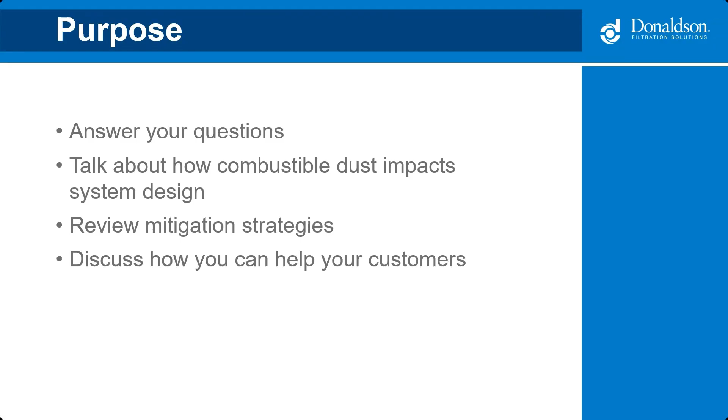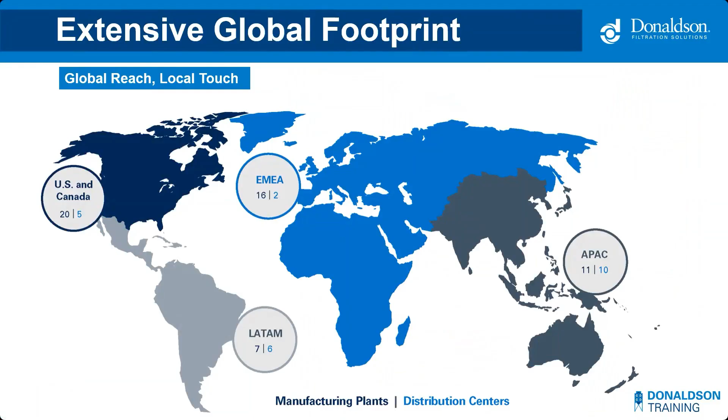In case anyone isn't familiar with Donaldson Company, we've been solving customers' complex filtration challenges for over 100 years. We were founded in 1915 by Frank Donaldson Sr., who invented the world's first filter for a tractor engine. Today, we're one of the largest providers of unique filtration technologies, and we excel at producing high-quality filters and equipment. We pride ourselves on having a global reach with a local touch. Our world headquarters is here in Bloomington, Minnesota, but we have about 54 manufacturing plants around the world and 23 distribution centers.

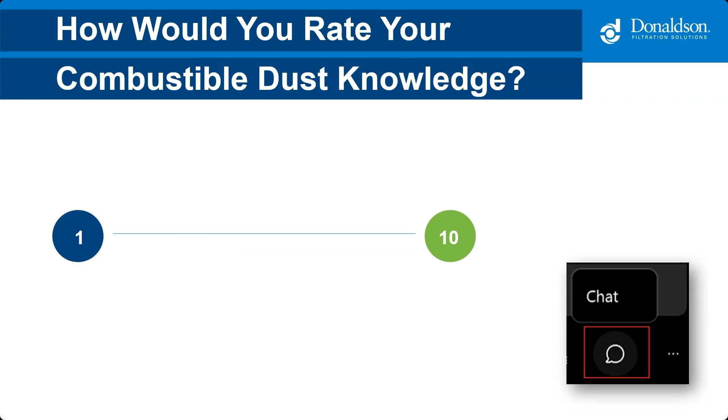It was from those 2 events that OSHA created this national emphasis program, and they started looking at combustible dust in industries that create combustible dust as part of their manufacturing process. In 2007, they released the national emphasis program, and they highlighted some of those industries. Food, ironically, was not one of them. And the following year, there was the Imperial Sugar event.

Imperial Sugar is a well-known catastrophic combustible dust incident. That revised the national emphasis program. They added food and additional industries.

Since 2008, there really wasn't much change to the national emphasis program, besides the creation of the NFPA standards and ongoing updates to those standards. And throughout it all, combustible dust events continue to happen. In 2015, there was a massive flash fire in Taiwan, and events happened both locally in the US and worldwide. Didion Milling was one that was in Wisconsin in 2017.

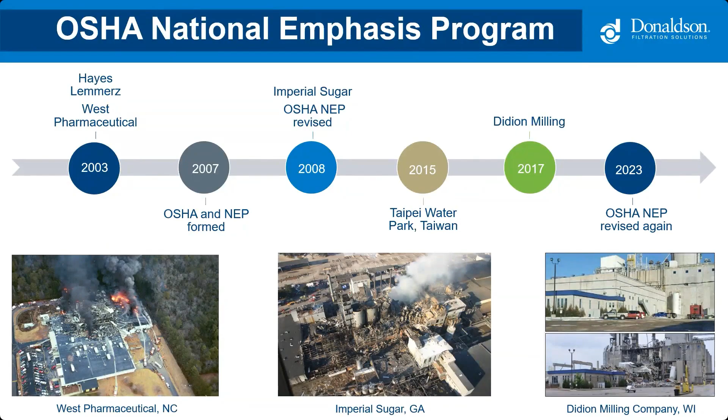One of the great things about all of these events is we can learn from them, and hopefully that's what we're going to do today, talk through them. It is something that happens every day, and continues to happen. So by building awareness, by learning about this topic, hopefully we can help reduce some of those next significant and major fatalities from happening in the future.

So we talk about OSHA. OSHA is in most cases a code that manufacturers will have to follow, but NFPA is what's called a standard. So in the US, we have both codes and standards. Codes are adopted by cities, states, and municipalities. Famous ones would be the International Fire Code or the International Mechanical Code.

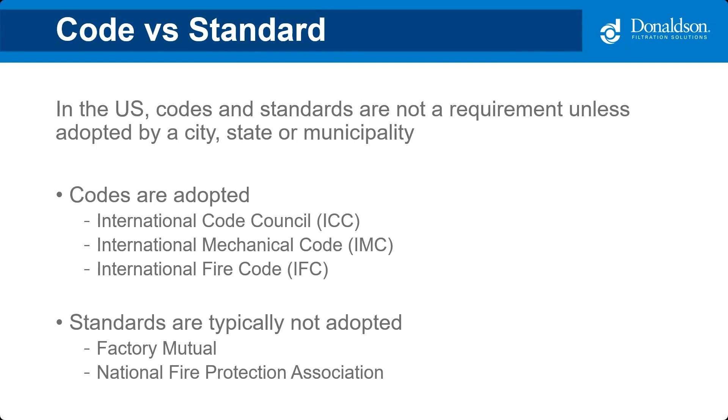Standards, however, are not typically adopted. So NFPA is a standard. It is written like a code so that if it is adopted, the language is right there, but unless it's adopted, it's not actually enforceable. Other standards would be Factory Mutual. They are an insurance provider and they have their own written standards for how they handle and manage combustible dust incidences.

This is what NFPA standards look like. These are most commonly used in the combustible dust realm. NFPA 660 was created last year, end of 2024, and it's a culmination of all of the previous industry-specific standards for combustible dust. You may have heard of 652, the standard on fundamentals of combustible dust, as well as 484 for metals, 61 for grain or agriculture, 664 for wood. Those were all put together into one giant standard, NFPA 660.

It provides guidance quickly for your generic guidance, doing your DHA, management of change efforts, all of that, as well as industry-specific standards. The reason why they did that is because they found that processes and manufacturing facilities around the world didn't actually just use one type of material. They often found themselves using wood and the general standard, or using grain and wood within their facility. So by having everything in one place, it provides easy access to all process owners to see the differences in how the mitigation strategies are approached.

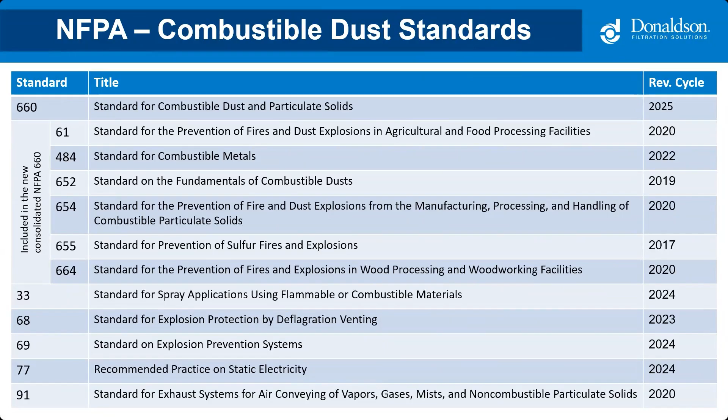In addition to 660, we will often reference 68 and 69 for mitigation strategies such as deflagration venting and explosion prevention systems like isolation, as well as 77, which is bonding and grounding and static electricity procedures, and then 91, which looks more at your industrial ventilation systems.

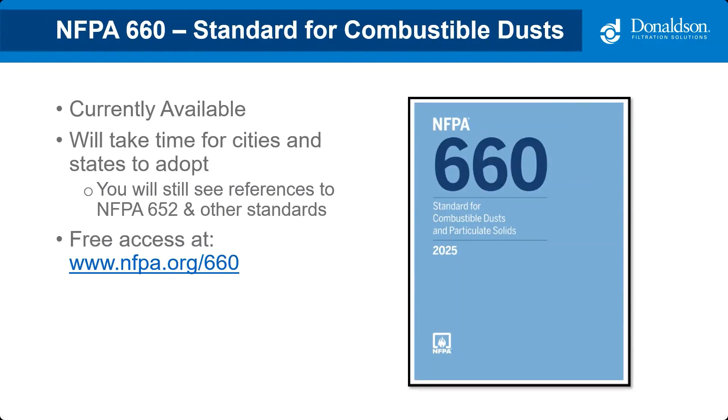660 is going to take some time for people to adopt, so you will still see reference to other standards. I encourage you to go on to nfpa.org if you have any questions. All of the standards can be accessed for free. You can also purchase copies if you want to mark them up and reference them as you'd like.

So besides attending trainings like this, what can you do to help familiarize yourself with combustible dust? The first step is to just get awareness of NFPA. Familiarize yourself with combustible dust hazards, with the type of materials you're looking at, ask about local codes, ask about FM Global if that is appropriate for you. Otherwise, familiarize yourself with the NFPA standards. Awareness is going to help increase our mitigation strategy, which is hopefully going to produce better results going forward as we continue to grow in the manufacturing industry.

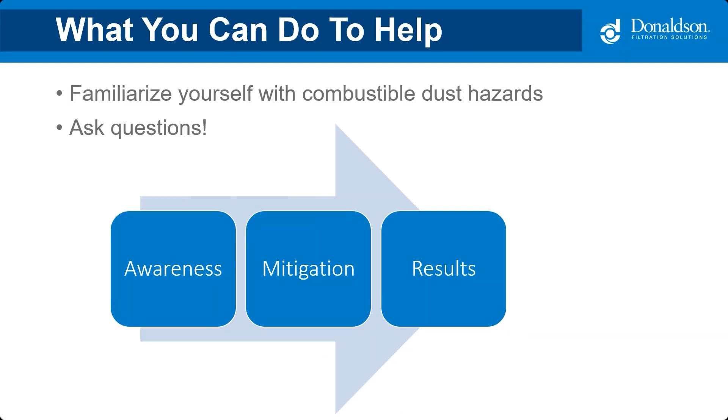So there's three main combustible dust hazards that we deal with. These fine particulates will change based on either the manufacturing process or the type of products that are produced. But in general, the fine particulates do present three types of hazards: a fire, which is a fuel source, that's your combustible dust; oxygen, usually a system will have air pulling it through; and an ignition source.

So it's important to address these risks throughout the whole life of the process. So looking at different scenarios, how does your risk profile change if it's at startup, if it's at normal operation, and if it's at upset conditions, right? Based on when we're using our products, we want to understand what are the potential hazards that we could come across really at any given time.

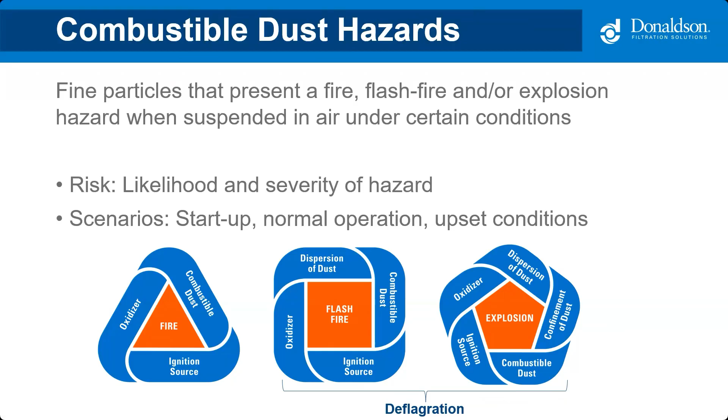So why dust collectors? Well, we collect dust. That's what we do. So if we are managing and collecting a combustible dust, that creates the fuel within our environment. During normal operation, our filters will often pulse clean using compressed air, and that pulse is what disperses that finely divided particulate into the environment.

We, in most cases, will have a fan that's moving air from point A to point B, so that's creating oxygen within the system. The dust collector housing creates a confined space, right? All of this is happening within a dust collector housing.

What we don't provide is an ignition source. Ignition sources will come externally, just like the fuel is brought into the collector. Ignition sources can also be brought into the process. And so because we have potential for all five of these, fuel, dispersion, oxygen, confinement, and ignition sources, to be present, dust collectors are a very critical part of an overall mitigation strategy.

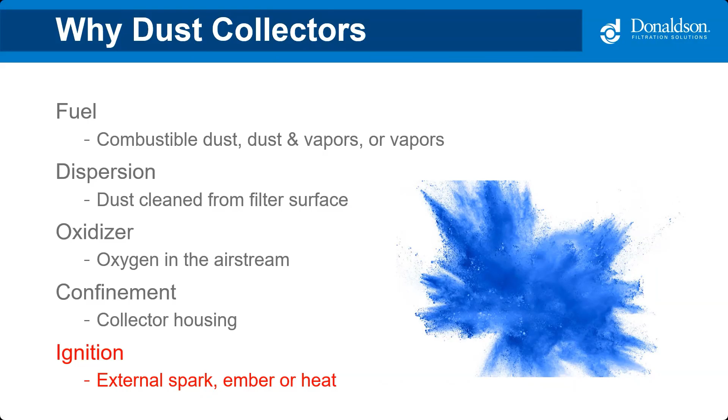So what if you don't know if your dust is combustible? Usually if you're working with an engineering firm or you have a brand new facility that you're building, you don't have dust to get tested, and so you may not know if it's combustible or not. If you do, the quick answer is you should get it tested. If we don't have that dust, we'll talk a little bit about how we can get some insight into the potential if that dust is going to be combustible or not.

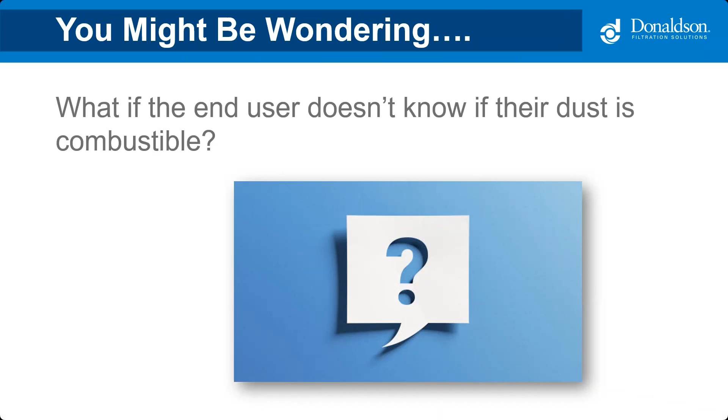So when it comes to combustible dust testing, we want to make sure we understand what's in the airstream. The easy one is if it's a dust, right? We can get dust tested, and there's third-party companies out there that will do combustible dust testing. The two main ones are going to be testing for a KST and a Pmax value. These are going to give you an indication of how explosive these materials are going to be.

Higher explosivity levels will mean you need mitigation strategies that are going to react faster than lower KST or Pmax values. In addition to KST and Pmax, things like minimum ignition energy—how sensitive is that dust to an ignition source—might be important, especially if you have a dust that has a very low sensitivity value.

Things like bonding and grounding or media choices might be really important to that strategy. Minimum explosible concentration looks at whether you have a sufficient quantity of dust to even create the environment for having an explosion. Within the dust collector, usually when you're collecting dust, yes, we do have that. So it's not really a strategy of saying, I'm going to clean my dust collector really well, and therefore I don't have an event. Not really a strategy we recommend.

If you also are dealing with any gases, VOCs, or other contaminants that could come through, there's also testing such as your lower flammable limit. Those are a little bit more challenging, and again, maybe not known at the beginning of a process, but it's important to recognize if you do have them—we have testing methods available to help indicate additional hazards that might be present within the system.

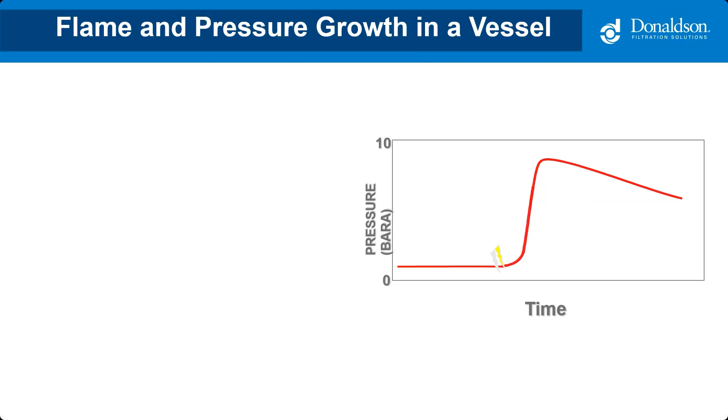So this is one of my favorite charts, and it helps explain all of the different pressure related terms as they relate to combustible dust. So what you're seeing on the screen is a graph of the pressure wave during a deflagration. The little lightning bolt there, that's our ignition source. And what you can see is this red line is going to escalate very quickly. The highest value that that pressure is going to achieve is called your Pmax value.

This is the maximum pressure reached in a contained deflagration. That P max value is usually in the realm of about 8 to 10, maybe up to 12 bar. That's usually what we're seeing. That P max value is not going to be something we want to try and contain.

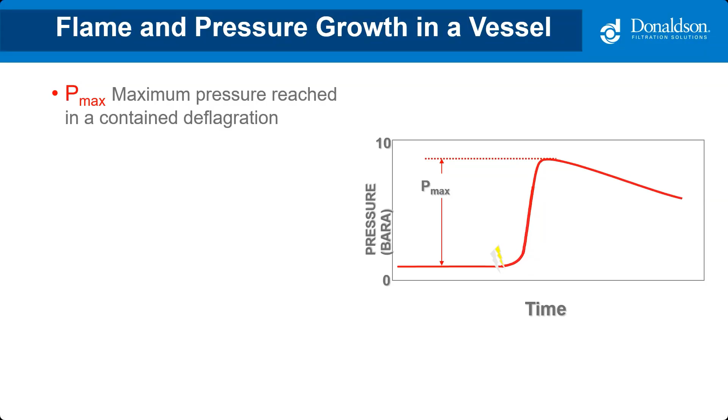It doesn't make sense to build your dust collector so that it withstands the P max value. What we want to do is incorporate a predetermined weak point in the collector to let that pressure out of the vessel. That weak point is going to be an explosion vent. An explosion vent is specifically designed to open at a significantly lower pressure. We're talking 0.1 bar for those of you who like your numbers. That explosion vent is going to open far before we can even reach that P max value.

Now, as that explosion vent opens, that pressure wave is growing so quickly that not all of the pressure can be released at one time. So you still will have this growing pressure rise that's going to be created within the vessel, and then it's all going to exit through that opening of the explosion vent.

That growing pressure, that residual pressure, is called your P red value. This is a calculated value, and it's based on the volume of the vessel, the type of dust that you're collecting, the size and quantity of the explosion vent, and a lot of other factors. What we want to make sure is that the enclosure strength of the collector, the rated P red value of the collector, is above that residual P red value.

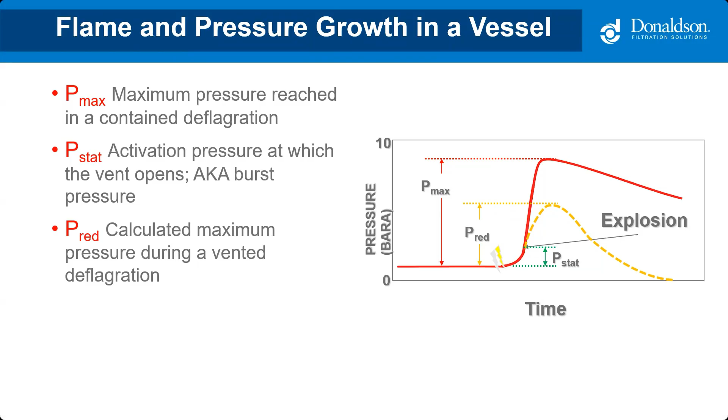We want to make sure that nothing else is going to open or cause issues, that all of that pressure is going to be released through those explosion vent openings at one time.

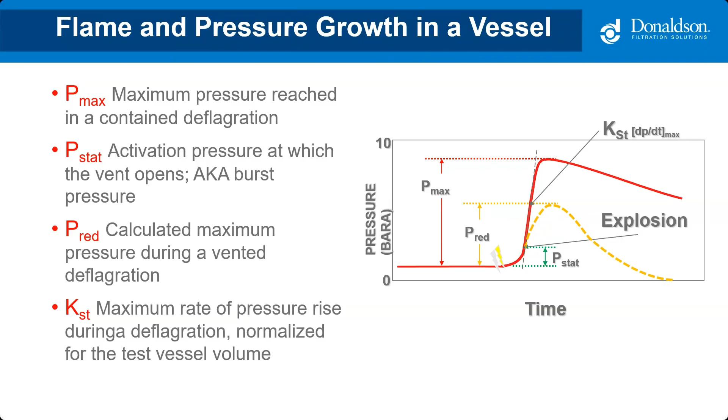The slope of this line is your KST value. It's your rate of pressure rise over time. And this KST value is going to be anywhere from 1 to 300, 400, 500 bar meters per second. So it can really vary based on the type of material that you've got, but it's basically going to indicate how quickly will that dust reach that maximum pressure.

If you don't have dust to test, there are other resources that you can access to get a feel for if this material is going to be combustible or not.

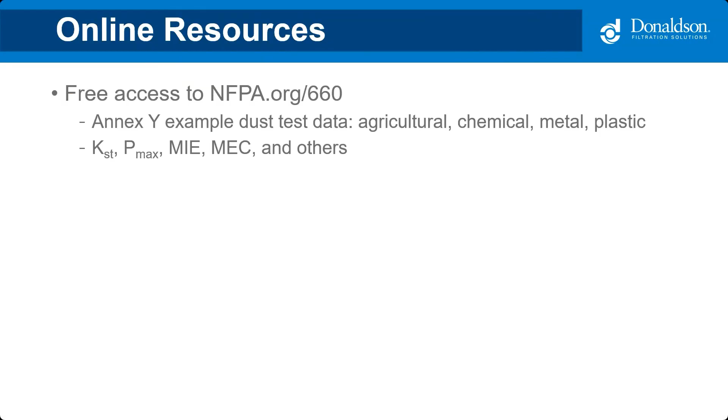NFPA.org slash 660, in the annex, they have information on common dust materials for agriculture, chemical, metal, and plastic industries. They'll list generic KST values, MIE values, and other information.

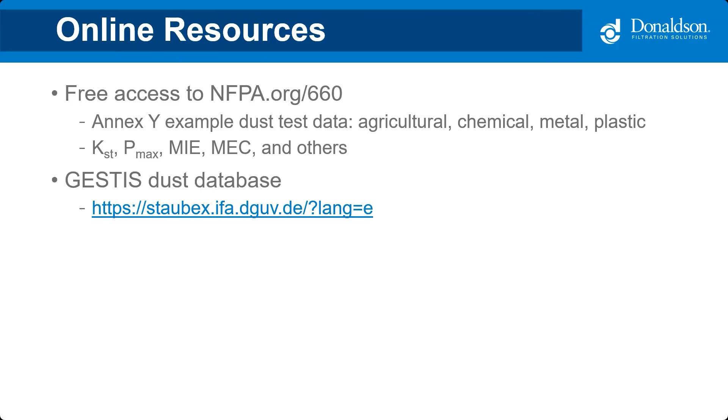So an ST1 dust is something that's less than a KST of 200. An ST2 is between 200 and 300, and an ST3 is anything greater than 300.

Again, even though it says weak explosion or a strong explosion, this doesn't mean that you're not going to have damage. Any type of combustible dust event has the potential to create damage within your facility, so we want to make sure they're mitigated appropriately. The reason why we ask for KST values is because depending on the value, that will change the mitigation strategy that you use to minimize and reduce those risks from happening.

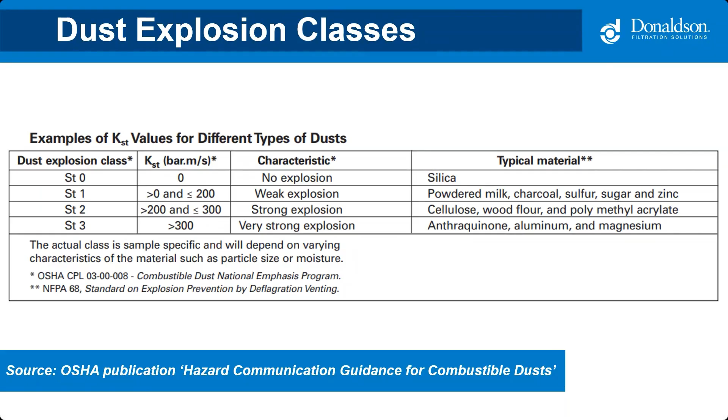So as you go through and look at this, part of the industrial ventilation system and the design of the system is really important. We want to make sure the combustible particulate is captured appropriately and conveyed at an adequate velocity to get from point A to point B.

It's filtered appropriately, right? We have the right media, we know what the contaminant is, and then you've got clean air that is either returned back into the building or exhausted to an outside atmosphere.

Depending on mitigation choices and where the collector is located, there's a lot of design factors that go into the system. You also have the risk of people modifying the system. How would the addition of a new process impact the strategy? Does that throw off airflows in the system? Does it add new contaminants? That's going to be part of a management of change practice that process owners will want to consider.

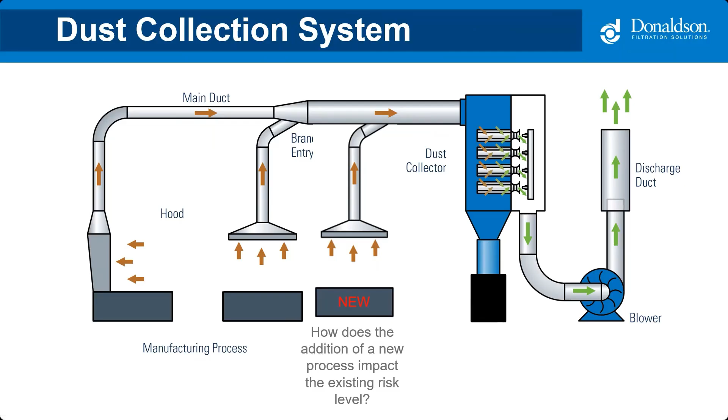We use the Industrial Ventilation Manual for sizing dust collection systems. This year they added a new hazard management section, addressing its role in designing industrial ventilation systems as part of an overall mitigation strategy. NFPA 660 also added information stating we need to design the system so we have adequate velocities to capture, control, and contain the dust. We want to make sure we've got good pickup points and velocities within our duct system, and for that they also reference users to the ACGIH Industrial Ventilation Manual.

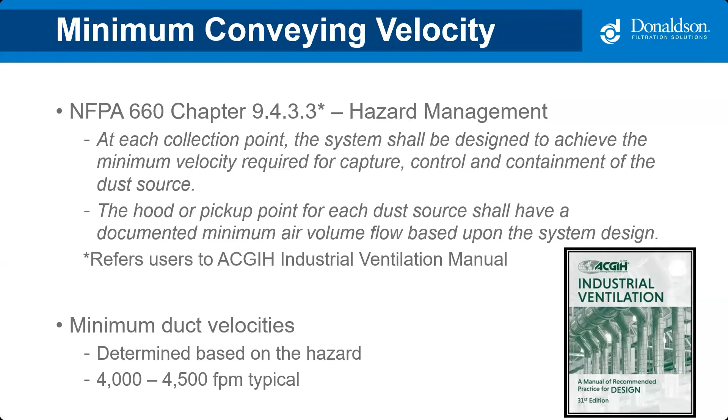Depending on the dust you are collecting, we want to look at different conveying velocities within the system. All of these conveying velocities will impact the static pressure of the system. It might impact changes to duct size, changes to airflow, which then might impact changes to fan horsepower or other things.

If you don't have enough velocity to convey the material, the result would be material settling out in your ductwork. We want to avoid that at all costs. We design systems to maintain the minimum velocity at all times, even if there are challenges or unknown factors once the system is installed.

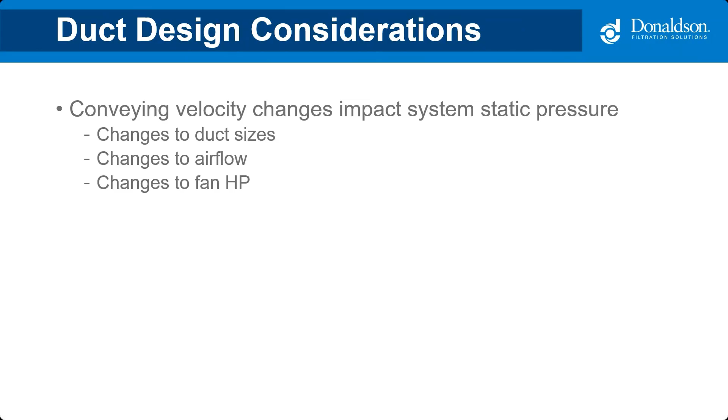We also want to minimize obstructions in the ducting. We recommend using a balance by design approach rather than blast gates, because blast gates can create a potential for material to build up within the ductwork. You also want to have clean out doors appropriately spaced throughout the ductwork so you can do a visual check to make sure nothing is settling out.

If possible, use controls like VFDs and airflow controllers to maintain or at least indicate if you have a reduction in airflow, as that could lead to an increased potential for a hazard such as dust or material settling out in your ductwork.

One of the big questions is returning air to a building or exhausting it outside. This is a great question and I get it all the time. The answer really depends on the type of material you're collecting. We might address this later in the presentation, but if you decide to return air rather than exhaust to the outside environment, just know that NFPA often requires additional mitigation equipment, such as a safety filter or some means of detecting a breach in the primary filters. They also recommend having a way to divert air to the outside atmosphere if there's a fire or something else going on within the system.

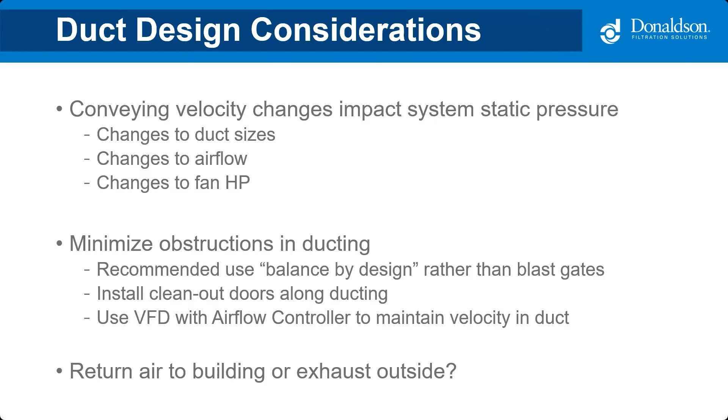So if we know the dust and the airflow, we can start looking at the right technology for what we've got going on. There's a lot of different dust collection technology out there. We've got cartridge style and baghouse style, your more traditional styles. We also have wet collectors and enclosureless collectors, even some intermittent shaker style collectors. A lot of these can handle various mitigation strategies, so explosion vents, chemical suppression, flameless vents, or no mitigation. It really just depends on making sure we've got the right technology to filter the contaminant, and then looking at how we support this with the mitigation strategy.

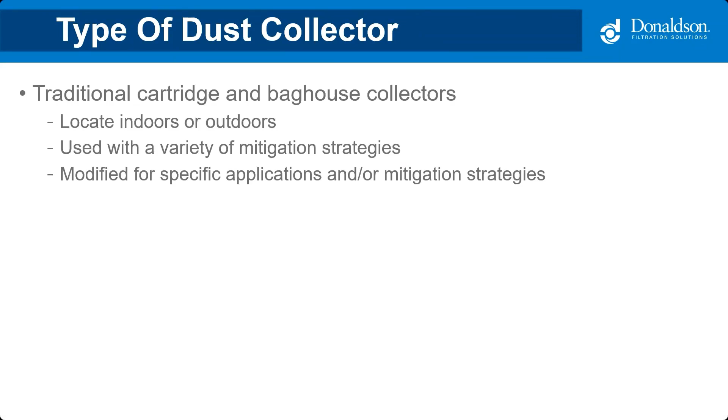Traditional cartridge and baghouse collectors are quite easy actually. They can be used with a variety of mitigation strategies. They can be indoors, they can be outdoors, and they work across various industries and applications.

You've got a fan, and you would have dispersion potentially, depending on how the system works, but you don't have the confinement—that's your enclosureless system. So without that, you don't have the risk of an explosion per se, but you do still have the risk of a fire and a flash fire because you have everything else in your system.

These are sometimes a strategy that intermittent processes will adopt. They are limited by airflow and by application. So if this looks like a potential option for you, I suggest reaching out and getting some more information on how it can potentially be a strategy for you.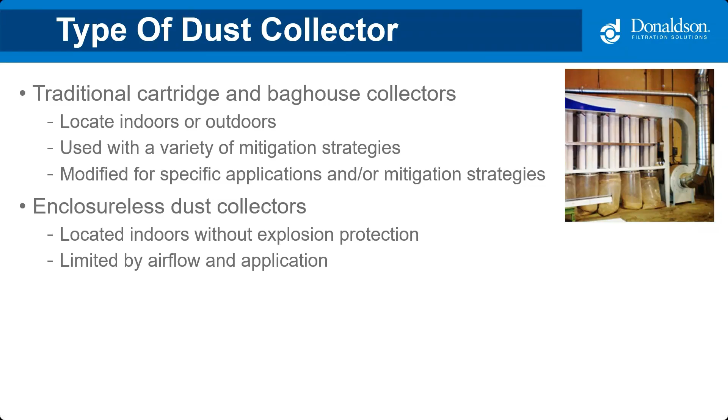The other one is a wet collector. NFPA 660 in the metals section often recommends using one of these to help mitigate the effects of a fire or explosion. It's really important that you pay attention to material compatibility so we don't have any sort of off-gassing or other issues created by this.

Wet collectors are a different technology than your traditional cartridge and bag houses, so it's important that you look at all system requirements—installation and maintenance—compared to other types of technology.

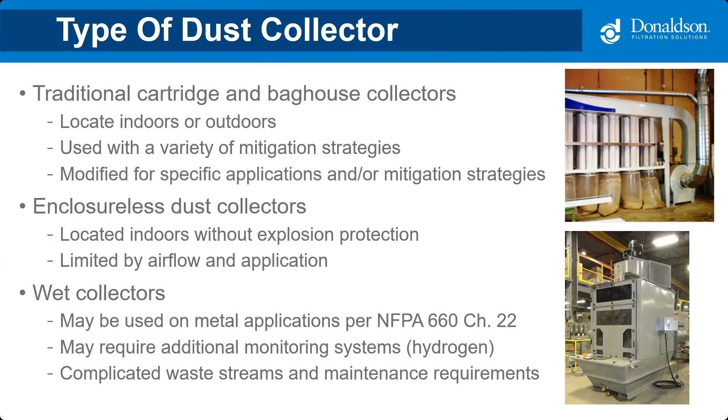NFPA really wants you to have the collector outdoors, as does OSHA. They always recommend that. If you've got a collector volume greater than 8 cubic feet, it shall be located outside of a building. However, if it's properly protected for fire and explosion risks, it could be allowed in.

If it has a dirty air volume less than 8 cubic feet, or if it's a wet collector or an enclosureless collector, those are allowed to be indoors. When in doubt, put the collector outside.

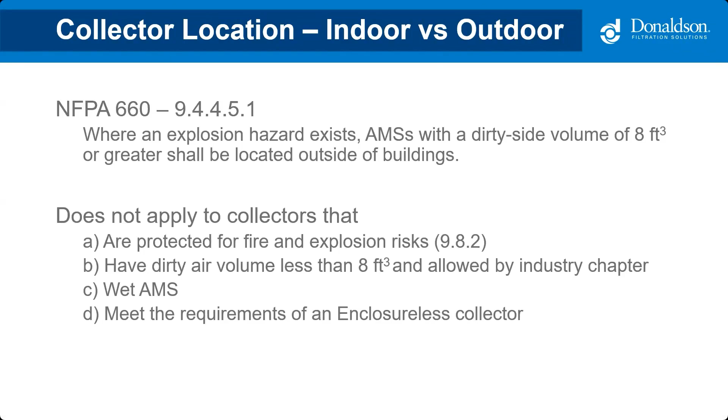The exemption for small collectors less than 8 cubic feet is not because there's no risk. Just because you use a small vessel to collect the material doesn't mean that vessel changes the characteristics of the dust and it's no longer combustible. That's not true—your dust is still combustible, no matter what you collect it in.

The requirement for less than 8 cubic feet comes into play because it's physically hard to mitigate a small vessel. Eight cubic feet is 2 feet by 2 feet by 2 feet, and it's really challenging to put an explosion vent on a small vessel like this. So those strategies become very impractical, and that's why it's in here.

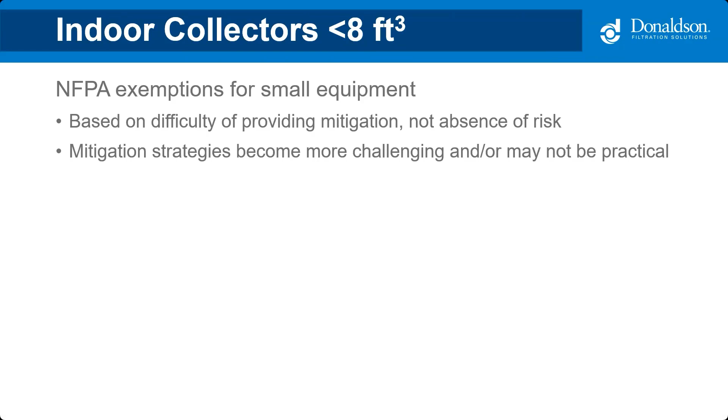The standard is more for little small vacuum systems, and for those you will find specifically designed NFPA compliant vacuum systems. If you choose to go this route, NFPA recommends that during your DHA, your dust hazard analysis, you look at the potential consequences of a fireball.

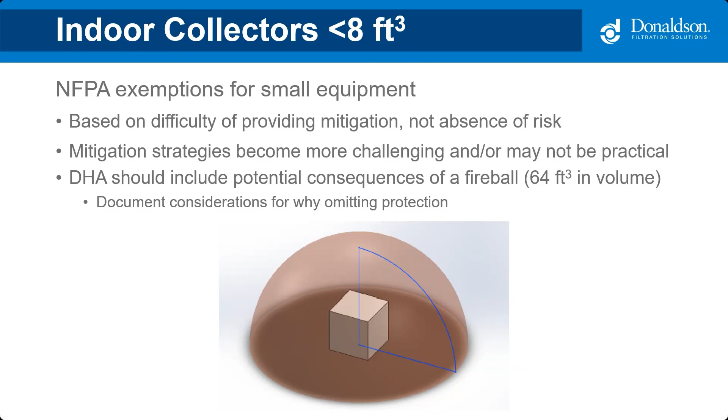So if something happened, they recommend looking at 8 times the volume—8 times 8 is 64 cubic feet in volume. If your device is sitting on the floor, this would be a sphere with a radius of 5 feet in all directions. It's important to look at, based on where this device is located, what is potentially in the area that could get harmed if something were to happen.

NFPA gives guidance on central versus dedicated systems. Their big thing is not mixing contaminants. So if you have a wood shop where you've got saws, lathes, and sanders, it's all wood dust—just in different shapes and forms depending on the process creating it. All of that dust can be brought to one collector to be filtered out. That's called a manifolded system.

If you had a job shop with different lasers cutting aluminum, carbon steel, and stainless steel, you would want dedicated collectors for each specific application. The reason is that if you brought all of those metals to one collector, mixing them could create the risk of a thermite reaction. So looking at the operation and the different contaminants you're generating is really important in figuring out what dust collection strategy you're going to go with.

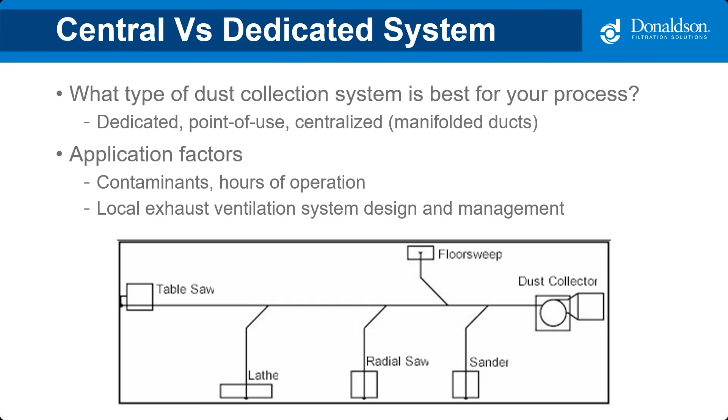For media, NFPA 660 says it can be constructed of combustible material. Most traditional dust collection systems are. Filter medias are cellulose or polyester, and you'll see that across all of the industry.

We want to make sure that all things are conductive, so not using ductwork made out of PVC pipe, but using metal duct that's all bonded and grounded. Anytime we've got a combustible dust, bonding and grounding practices are advised, just to make sure we don't have any isolated components within our systems.

We have epitropic or anti-static media, as well as media that can have a ground wire in it. That ground wire is used to bond together the inner cage with the tube sheet so that we don't have those isolated components.

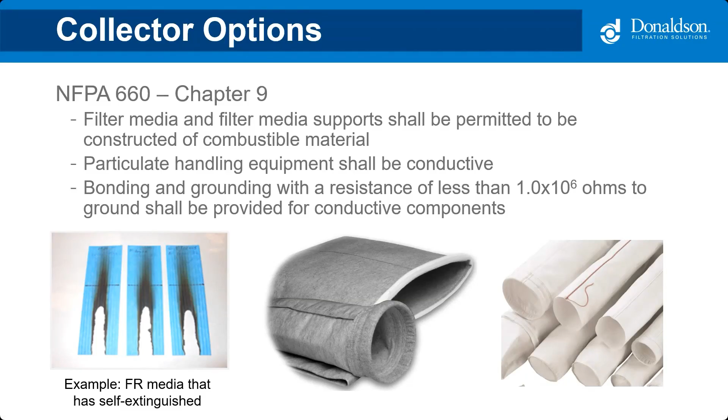In all of this, we also want to pay attention to the configuration of the dust collector. A lot of mitigation strategies are impacted by volume and height, such as explosion vent sizing. They look at those features of the vessel itself. So if you have a tall and skinny vessel, it could be more challenging to mitigate or provide enough vent area compared to a shorter and wider collector. This will also impact discharge devices and other options and features within your collector.

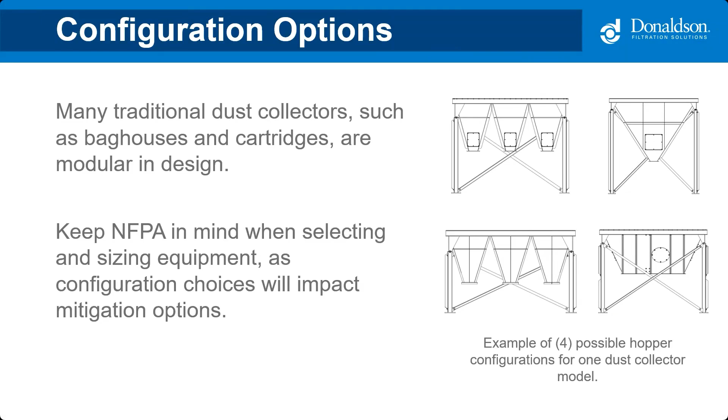So what are some typical mitigation options? Well, there are a lot of manufacturers out there, and they all have very similar versions of the same device. It's really important that we pay attention to the different high-level things, but always ask questions to those suppliers to make sure that you're choosing the right device. But we'll go through a couple of them.

So NFPA 660 has a new method for complying with the NFPA standards. This section is new, it was rewritten when they created NFPA 660. For those of you who have attended these webinars before, you might have seen a simplified version of this page where it was either a prescriptive requirement or a performance-based requirement. Simple. Now what NFPA is saying is you actually have to do two things.

In addition to either using mitigation strategies that are followed by a prescriptive requirement or a performance-based requirement, you have to follow the prescriptive methods outlined in chapters 5, 7, and 8 of NFPA 660.

These chapters cover your dust hazard analysis and your management systems. So things like doing your DHA, and then once you've done your DHA, identifying hot work practices, training for your employees, training for contractors, preventative maintenance schedules, identifying near misses, and all of these other things that most facilities are already tracking.

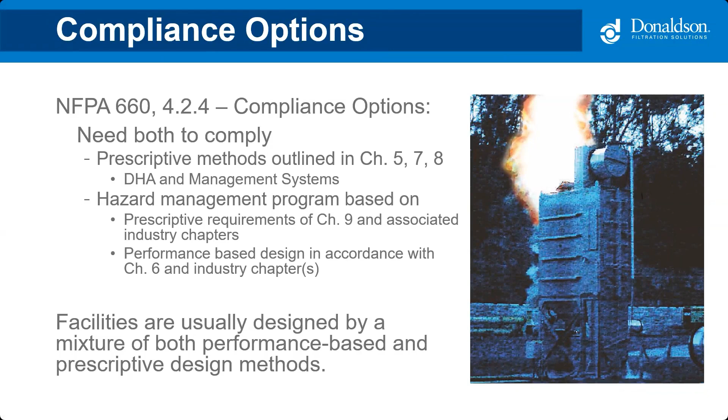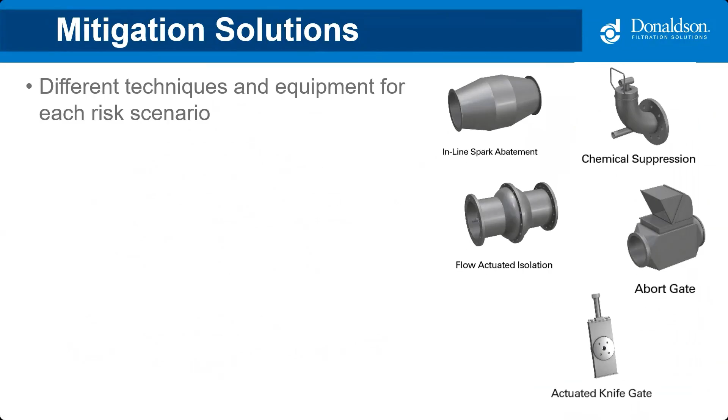So when it comes to mitigation solutions, there are different techniques and equipment for each scenario. Even if you have a sister facility in one state and you're in another, you're going to potentially have a different risk scenario. We want to make sure you choose strategies that meet the needs of your process and your dust hazards. And then you also look at different or associated system components.

Some of these systems, such as a flow actuated isolation valve, a flameless vent, knife gates, chemical suppression systems, they all have to be tied to a device that can shut down the fan. So if you don't have that integration with the control panel, the product might work, but the next steps of what happens in that sequence of events may not follow through.

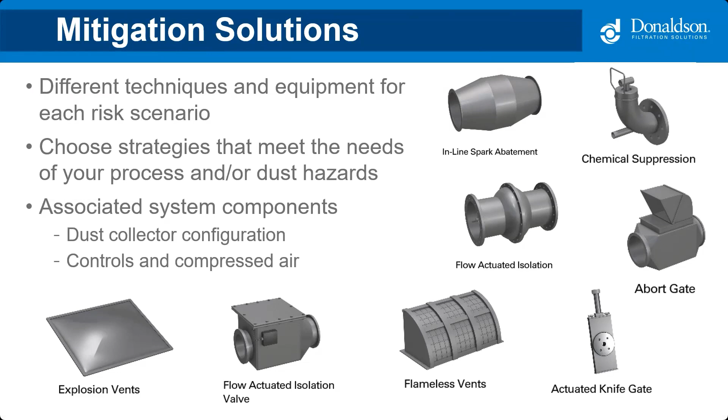When it comes to fire prevention, there are different strategies. We've got active spark abatement. That is looking at a spark detection and extinguishing system or a detection and abort system. There's passive devices that will go in line in the ductwork. And then you can also choose to have an inerting agent, such as adding lime or something to render the material non-combustible or non-flammable.

For secondary events, we have abort gates. That's going to stop smoke from getting back into your facility if you choose to return the air.

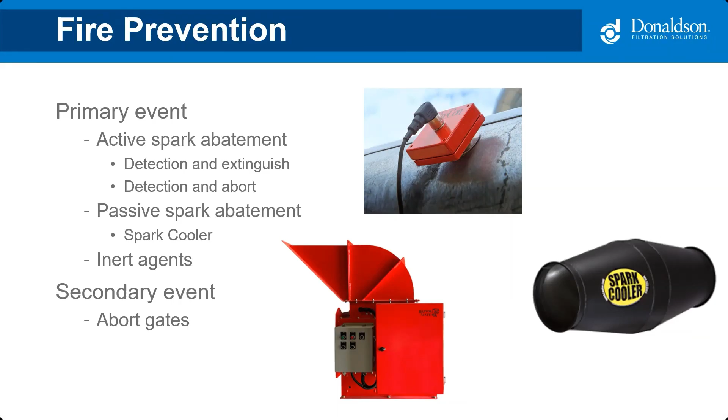When it comes to fire protection, we have wet and dry sprinkler systems, CO2 and argon. The biggest thing on this page is making sure you're using a material that's compatible with what you're collecting. If you're collecting aluminum, using water or a sprinkler system to suppress a fire is not going to work. You need to make sure you have a material that's going to be compatible with putting out an aluminum fire.

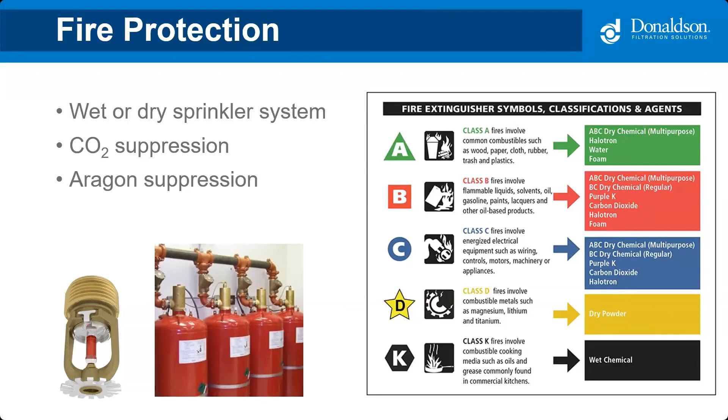For explosion prevention, again, we've got the same for ignition sources from the primary event. That ignition source was involved in fire, flash fire, and explosions. So if we can reduce those ignition sources from getting into the system, we're reducing the likelihood of all of those different hazards. So same events, spark abatement and inerting agents.

But what we add on to for an explosion is your secondary event. This is really critical. Inlet isolation is very important because what it's going to do is stop that pressure wave and that flame from traveling back upstream into the facility. If you think back to all of those images of Hayes Lemmerz, West Pharmaceutical, Imperial Sugar, isolation could have maybe helped reduce some of that damage. When that flame and particulate goes back through, it disrupts any sort of fugitive dust in a building, and it's those secondary events that we want to stop from happening because those are the ones that level plants and create that catastrophic damage. So making sure you have adequate inlet isolation is very important.

This can either be passive devices, such as a flap valve that will close based on a pressure wave, or it could be active systems such as a knife gate or a chemical suppressant agent. Regardless of which strategy you choose, again, you want to make sure you've got the right one that suits the dust and the material that you're collecting.

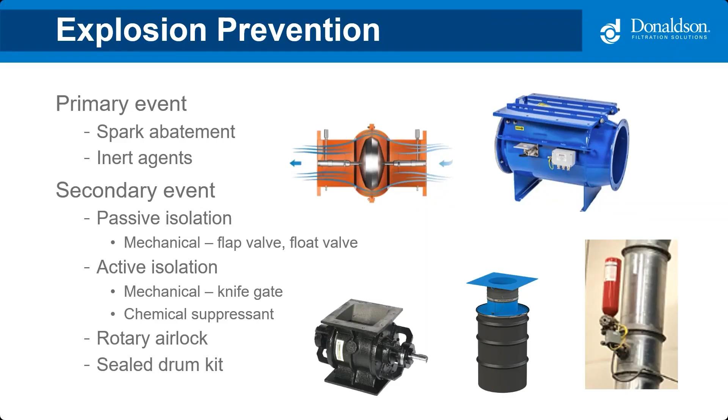For explosion protection, there's kind of three major ones. You've got traditional explosion vents, you have flameless vents, and then you have chemical suppression systems.

Containment is another option that NFPA looks at. That's where you build the vessel to be stronger than the Pmax value. Again, it's really not appropriate for most dust collection applications.

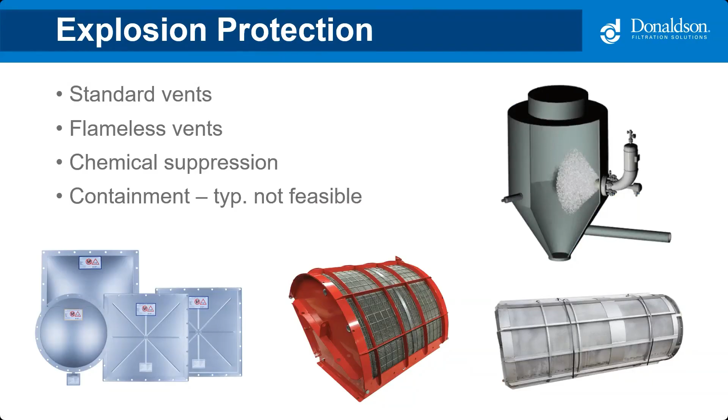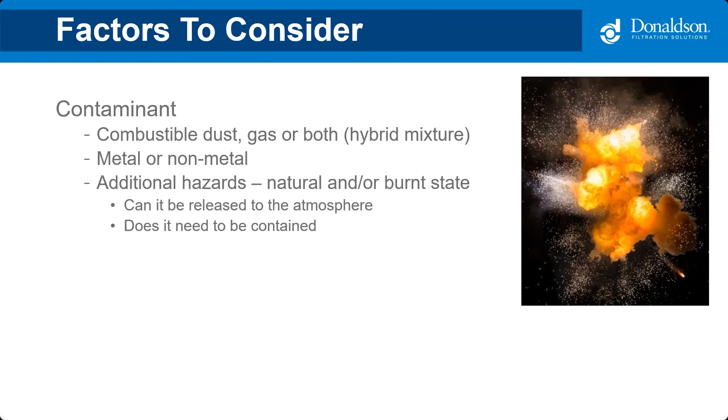If you're dealing with a metal dust, a lot of times these devices will have to have specific testing. Again, work with your manufacturer and make sure you've got the right testing to show that that product's going to withstand what you're collecting. Again, we've got required testing, limitations on how these products are going to be installed, and then making sure it's suitable for the material. The other one I didn't touch on quickly is just additional hazards.

Some materials, if you collect them, might be non-toxic in their standard or original state. However, if that material is burnt or catches on fire or something, it could create a toxic material. This is also something to consider, as a device or a strategy that encloses that material might be more suitable than one that releases it to the environment.

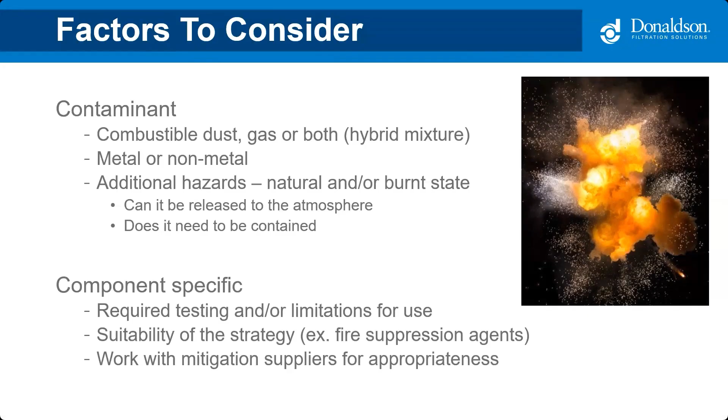The dust collector location is important. The dust collectors usually can go indoors or outdoors. However, if it's indoors, it might be more challenging to mitigate. You can't just stick a collector in the middle of the room and have an explosion vent on it. That would not be a safe practice. So if it is indoors, we want to duct the explosion vent to an outside wall. You can see that in this image here. Those duct vents have to be pretty short. We want to get that material in and out as soon as possible. And then we also want to make sure we've got isolation between interconnected pieces of equipment.

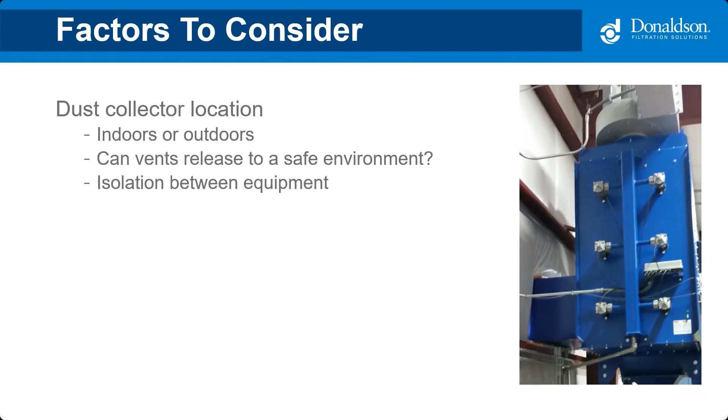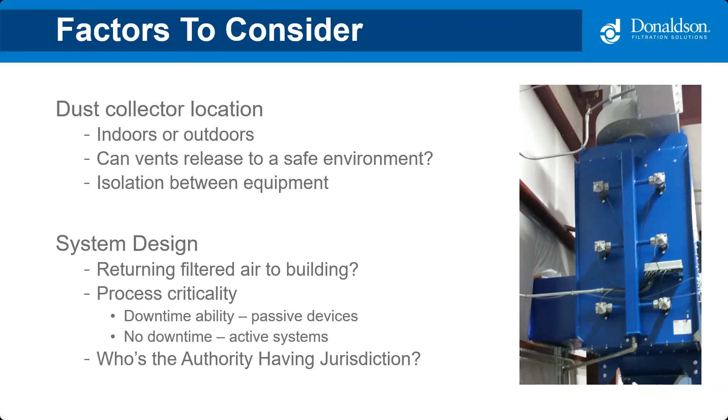For the system design, if we're returning filtered air into the building or not, that might impact static pressure, fan choices, duct choices. We want to also look at hours of operation, right? An intermittent operation versus a continuous 24/7 operation might lead towards a different strategy. And then, as always, we want to make sure we involve our authority having jurisdiction. That could be a fire marshal, an OSHA inspector, or your own internal EHS employees or legal team that help make some of these decisions.

Now, I know cost is never an issue - that's what I hear all the time. But in some cases, cost is an issue, and it's really important to pay attention to that. Passive devices are usually less expensive, but you're going to be left with a mess to clean up. If you have an explosion vent, you're going to have flame, particulate, and probably residue that you're going to have to clean up within the collector itself.

Active systems like CO2 for fire protection or chemical suppression are going to reduce the amount of cleanup or downtime that you have, but they're going to be more expensive and in most cases require quarterly or semi-annual checks by the mitigation supplier to make sure their equipment is operating appropriately. So you want to look at both initial and startup costs as well as commissioning costs, and then frequency of checks going on over the life of the system, as they can add up over time.

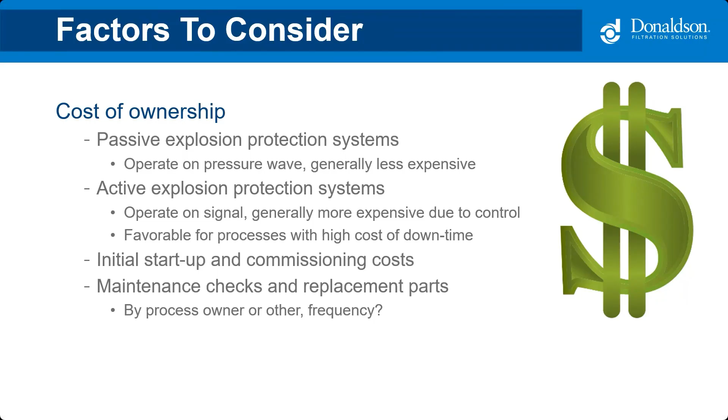So whose responsibility is it to do the DHA? Well, it's the process owner's responsibility, but they shouldn't be doing it alone. There's a lot of steps that go into doing a dust hazard analysis. You have to get informed about the dust you're testing and the processes creating combustible dust. You have to assess the risks that are there - is it a fire, a flash fire, or an explosion risk? Then we have to identify actions to reduce that risk, right? We want to get that risk out of the plant.

So we install a dust collection system to remove the fugitive dust from the facility, contain it, filter it, return clean air back in. There might be other strategies - adding fire mitigation, spark mitigation, explosion mitigation - all to help identify and mitigate those hazards that you've identified. Then you got to do it. That's the hardest part - we have to execute our actions once we've identified what's potentially needed.

And then we have to train our employees so if an alarm goes off, they know what to do. The fifth one is follow up. DHAs are a process - it's an ongoing activity. It should be a living document as part of your management of change structure. And we'll talk about this in the next slide.

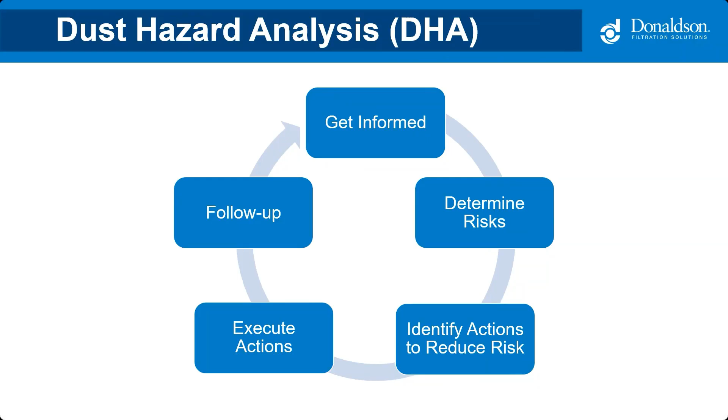Part of that is if you have any changes to your process, you're going to go back through and review. Does this impact our risk scenario? Does this change the KST of the dust? Does this change our strategy? Do we have turnover in our employees? Do we need to retrain our employees? If we have a false positive, or maybe a potential small event - a fire that gets put out right away - what can we learn and what can we change as part of that strategy?

This is chapter 9, your management systems, and it's going to look at how you manage change and other processes and practices within your facility.

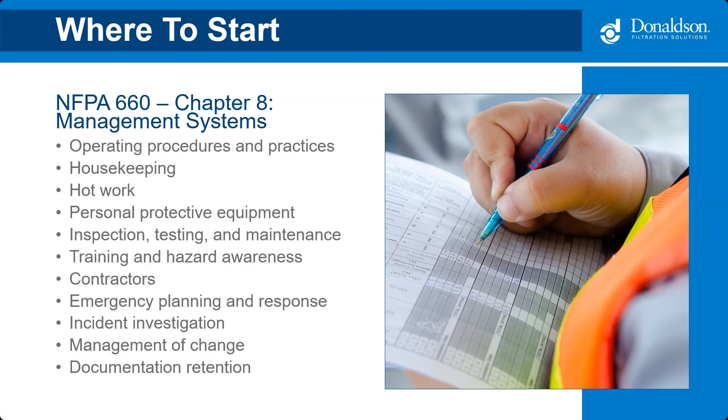Now, many of you are engineers on this call, and from a design standpoint, you may be asked for information to help support the strategy. This includes looking at the original design of the local exhaust ventilation system, looking at what goes into the choices you're putting in there. So if you have an isolation valve, is that valve adequate for the KST of the dust that the customer has given you? Ductwork sizes, static pressure and fan choices, control integration - these are all different things that could be asked for ahead of even your project getting installed.

So it's important to have that, but it's also important to give this information to your end user because they need to know how the system was designed in the first place, so that if their airflow in the system is reduced for any reason and they start making changes to the system and notice they don't have any capture velocity or low velocity in their duct system in another section, they have something to compare it to - say, okay, here's how it was originally designed, here's the impact of the change, now here's what we have to do. So you as engineers also play a critical role in helping customers mitigate and continue updating their system as they go.

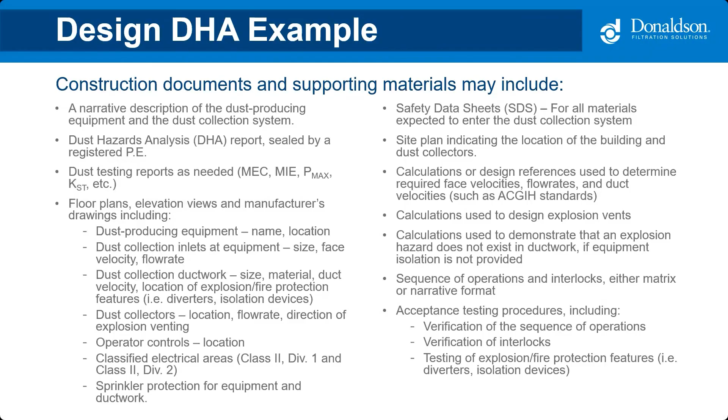Now, all of this is not done by one person. It really, truly takes a team. You've got to look at the engineers who designed the system, the suppliers and manufacturers of the various equipment and components out there, the company's EHS and legal teams, your AHJs, fire marshals, OSHA inspectors, insurance underwriters, and your employees. Ask them questions. They're a vital component to the mitigation strategy and making sure that it works correctly.

And then also your third parties who come in and do your process hazard evaluation or your dust hazard analysis. So all of this is a team of people looking at what it takes to create our strategy and then implement it. No one is alone, so please ask questions.